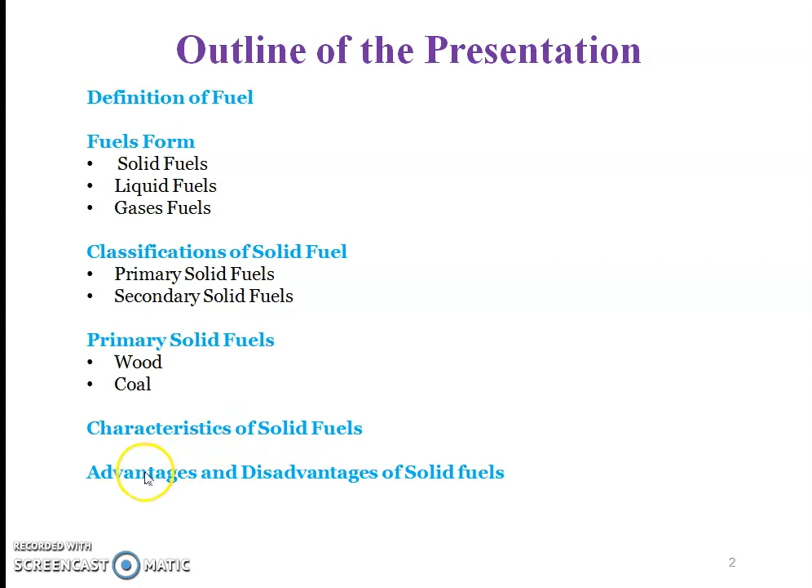The outline of my presentation is: definition of fuel, fuel forms, classifications of solid fuels, primary solid fuels, characteristics of solid fuels, and advantages and disadvantages of solid fuels.

A fuel is an artificially or naturally occurring substance which, often by burning or reacting with oxygen, releases a large amount of energy which can be used for domestic and industrial purposes. That means the chemical energy of fuel gets converted into heat energy, and this heat energy can be used for domestic and industrial applications. The substance classified as fuel must necessarily contain one or several combustible elements such as carbon, hydrogen, sulfur. Though sulfur is not considered a combustible element, it releases a large amount of pollution.

Next is fuel forms. Fuel forms are broadly classified into three types: solid fuels, liquid fuels, gaseous fuels. And there are two types of fuels: primary fuel or naturally occurring fuel, and prepared fuel or secondary occurring fuel.

Primary fuels are the fuels that occur naturally. Secondary or prepared fuels are the derivatives of primary fuels, or man-made fuels. If we consider solid fuels, the primary fuels are wood and coal, and the secondary fuels are coke, charcoal, and briquettes. For liquid fuels, the naturally occurring liquid fuel is petroleum.

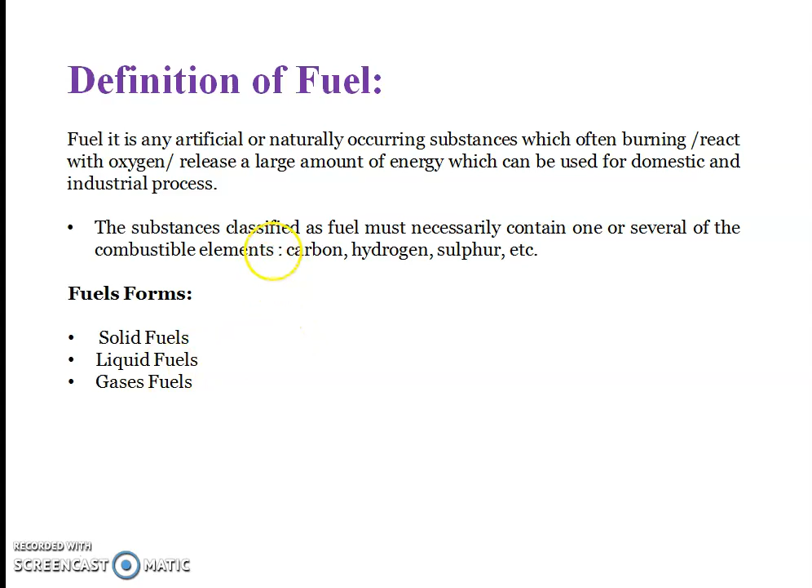The first one is solid fuels. As already discussed about fuels, we are now considering solid fuels. When we burn solid fuels, they release energy, providing light and heat through the process of combustion. This means the chemical energy of fuel gets converted into thermal energy by producing heat and light. Solid fuels are completely different from liquid fuels and gaseous fuels.

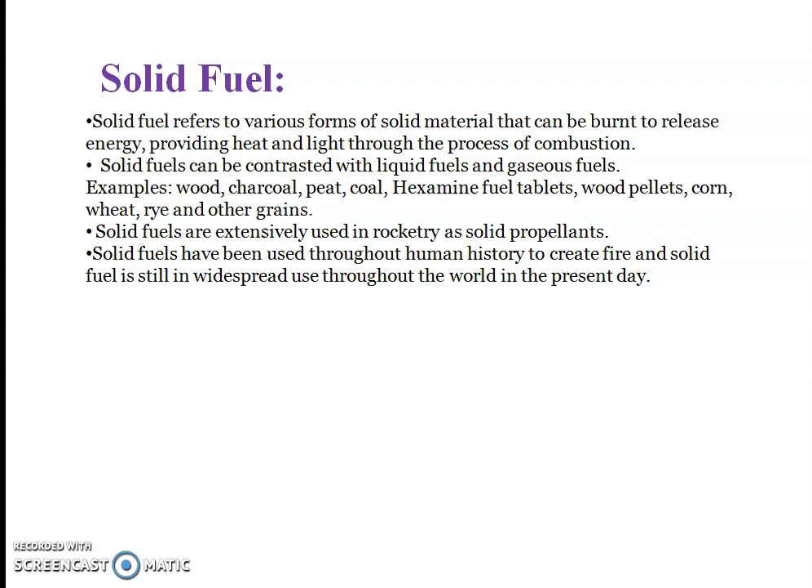Examples of solid fuels are wood, charcoal, peat, coal, hexamine fuel tablets, wood pellets, corn, wheat, rye, and other grains. Solid fuels are extensively used in rocketry as solid propellants. These are also used throughout human history to create fire, and solid fuel is still in widespread use throughout the world in the present day.

The first one is wood. The most commonly used and easily obtainable solid fuel is wood. It is the oldest type of fuel which man has used for centuries after the discovery of fire itself. Wood fuel can refer to several fuels such as firewood, charcoal, wood chip sheets, pellets, and sawdust. The particular use depends upon factors such as source, quality, quantity, and application.

In many areas, wood is the most easily available form of fuel, requiring no tools in the case of picking up dead wood, or few tools. Today, burning of wood is the largest use of energy derived from the solid fuel biomass. Wood fuel can be used for cooking and heating, and also occasionally used for fueling steam engines and steam turbines for generation of electricity.

Wood is a vegetable tissue of trees and bushes. Wood has been the main source of fuel until recent times, on account of relatively rapid growth and production and ease of obtaining supplies. Freshly cut wood contains a greater content of water, which is 25 to 30%, and dry wood contains 15% water content.

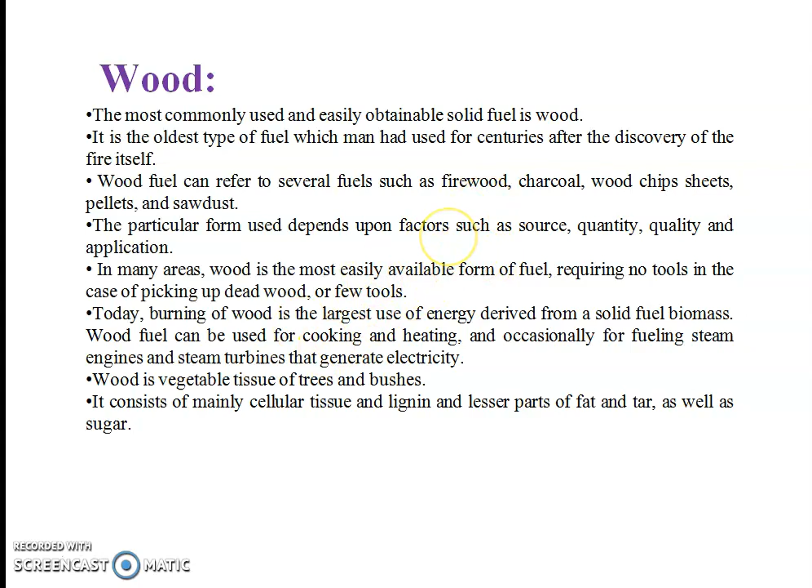The second form of natural fuel is coal. Coal is a combustible black or brownish-black sedimentary rock, usually occurring in rock strains in layers or veins called coal beds or coal seams. Another definition of coal is that it is a compression of wood over several years.

Throughout history, coal has been used as an energy resource, primarily burned for the production of electricity and heat, and also used for industrial applications such as refining metals. Coal provides the largest amount of heat for the generation of electricity worldwide, as well as being one of the largest worldwide anthropogenic sources of carbon dioxide releases. The extraction of coal, its use in energy production, and its byproducts are all associated with environmental and health effects, including climate change.

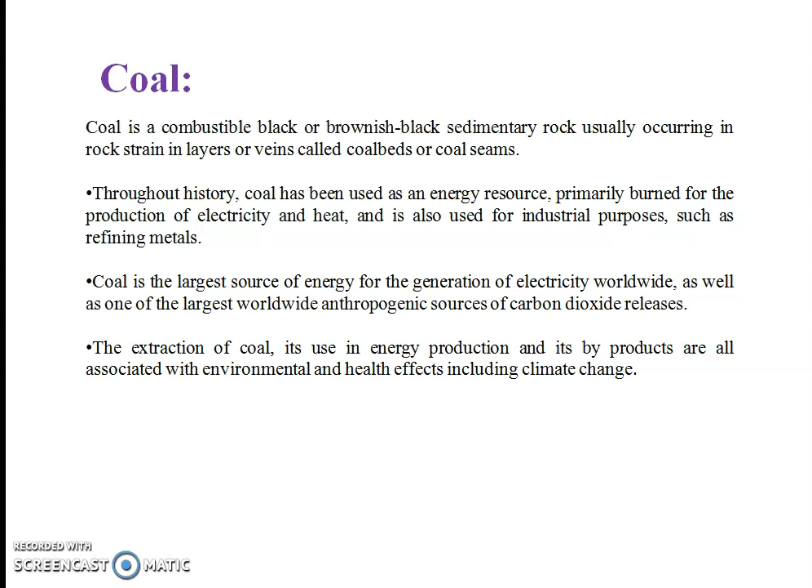Next, coal passes through different stages during the formation from vegetation. These stages are enumerated and discussed below. They are peat, lignite, semi-bituminous, bituminous, and anthracite.

And the first one is peat. It is the first stage of formation of coal from wood. It consists of a huge amount of moisture and therefore it is dried for about 1 to 2 months before it is put in use. It is used mainly for domestic purposes. In India, it does not come in the category of good fuel, but it is considered as a precursor of coal and has industrial importance as a fuel in some regions.

It mainly occurs in European countries like USSR 42%, Ireland, UK, Canada, Finland, Siberia, France, Germany, and Italy. Utilization of peat depends upon economical drying. Peat as such is only used as a local fuel and is not considered as an economical fuel. It is mainly used by briquetting with other substances as a domestic fuel. So the applications of peat are steam raising, thermal insulation, packing, gas purification, and soil conditioning. Russia uses it for power generation due to the shortage of coal.

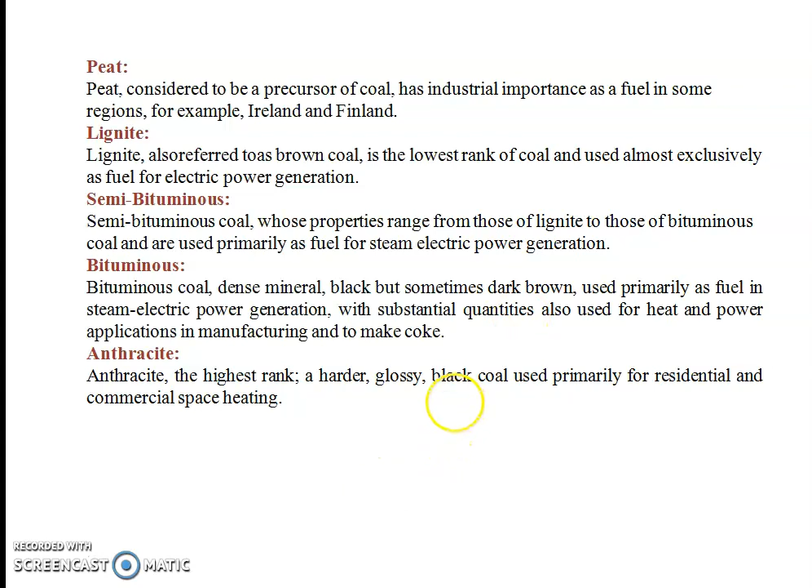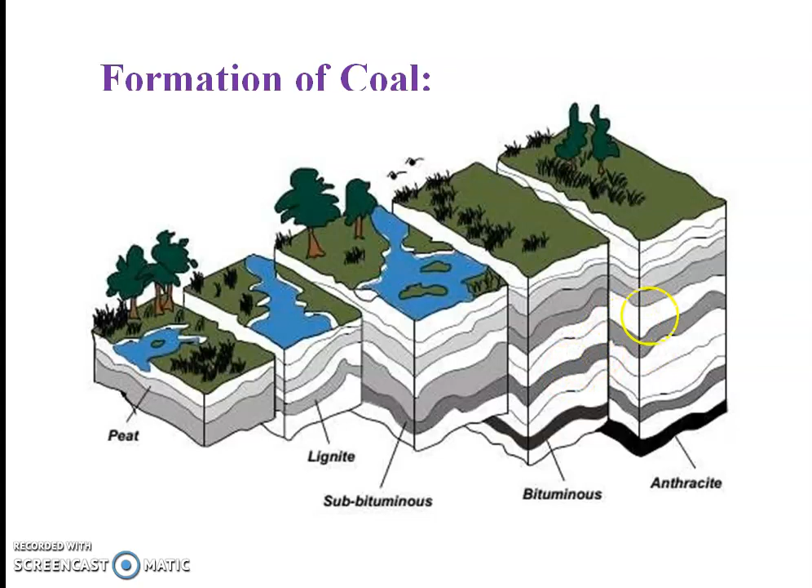And next one is bituminous. Bituminous occurs at a depth of 2.5 to 6 kilometers at 75 to 180 degrees centigrade. And the last one is anthracite. Anthracite occurs above 6 kilometers at a temperature above 180 degrees centigrade. And among these coal ranks, the highest is anthracite.

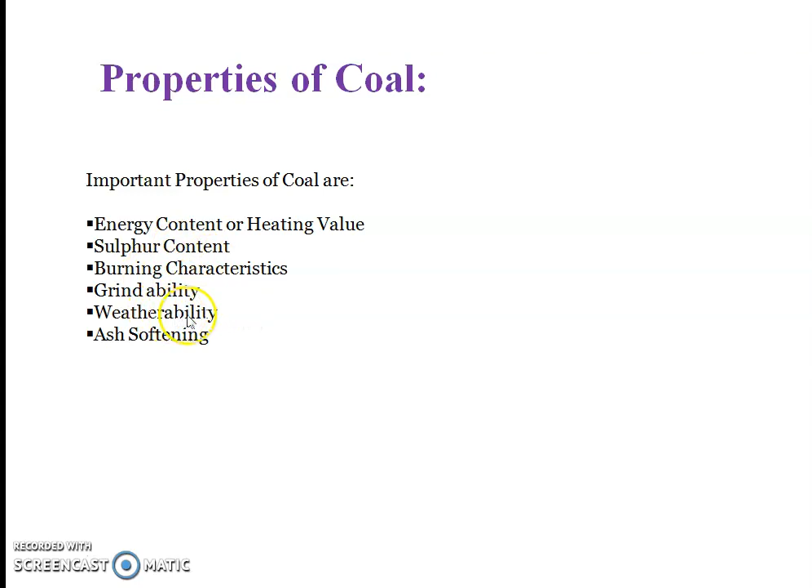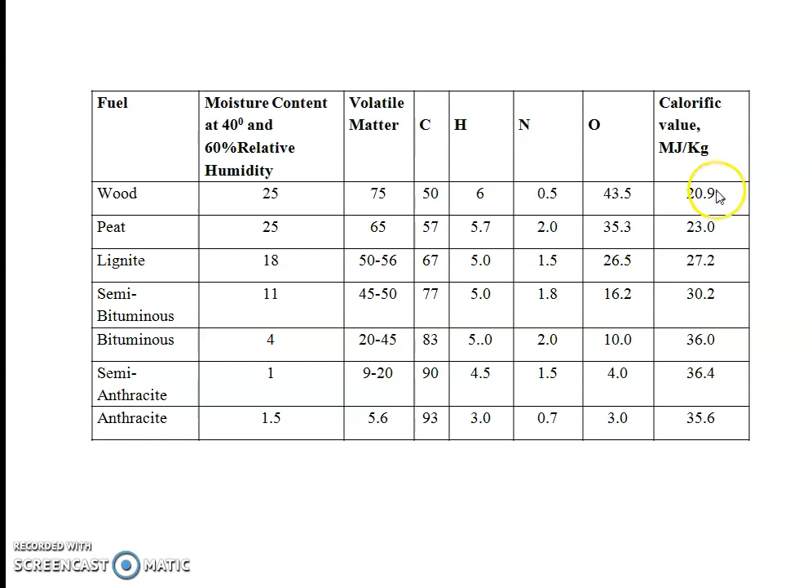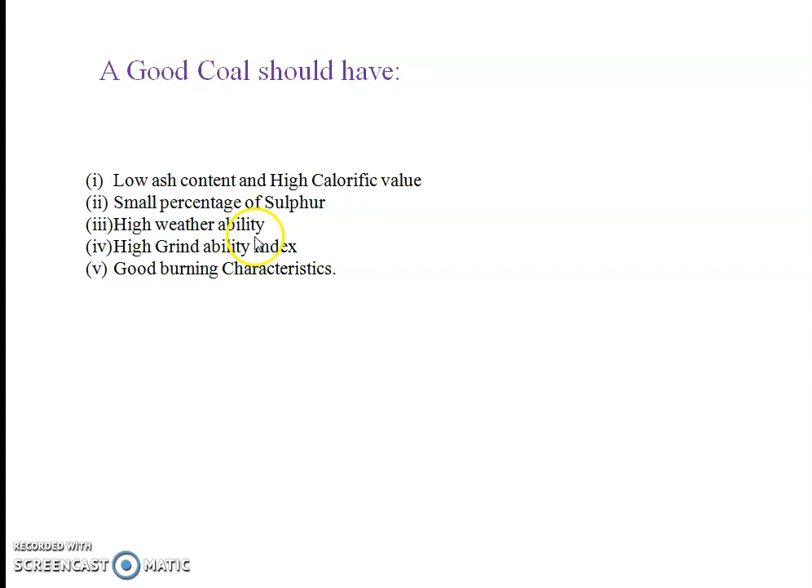And the highest carbon percent is observed in anthracite, hydrogen is least at 3 for anthracite, and nitrogen is least at 0.7 for anthracite and 0.5 for wood. And if we take the oxygen percentage, anthracite contains 3% oxygen and the highest value is for wood, 43.5. When we take the calorific value, it is highest for semi-anthracite and anthracite. So a good coal should have low ash content, high calorific value, a small percentage of sulfur, high weatherability, high grindability index, and good burning characteristics. These are observed only for anthracite.

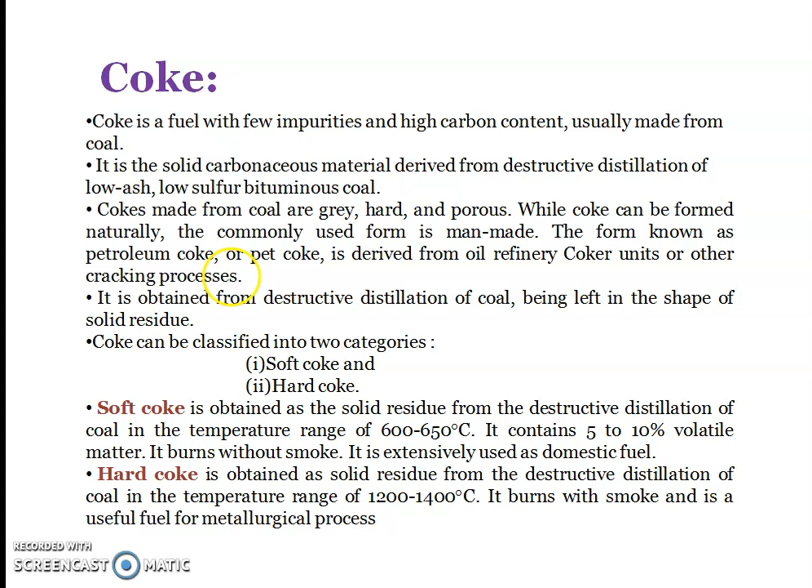And next one is coke. Coke is a fuel with few impurities and a large carbon content,